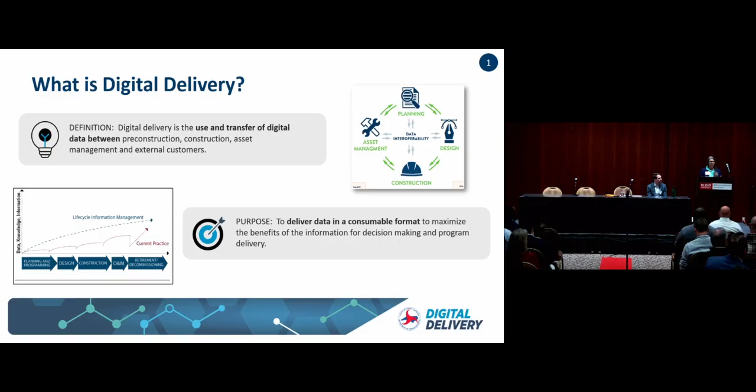The purpose is to deliver data in a consumable format to maximize the benefits of the information for decision making and program delivery. And I would say in NCDOT, from our digital delivery efforts, we have chosen to focus on design. There are lots of words going around about transformation and delivery, and you might have heard me say that in the general session yesterday, but when we're talking digital delivery, we have chosen to focus our efforts on design.

So we are not doing this in a vacuum. Efforts in North Carolina DOT and our industry and our team in general are trying to build on national momentum. So we're not doing this alone, right? We're trying to look at what has been done across the nation and really focus in.

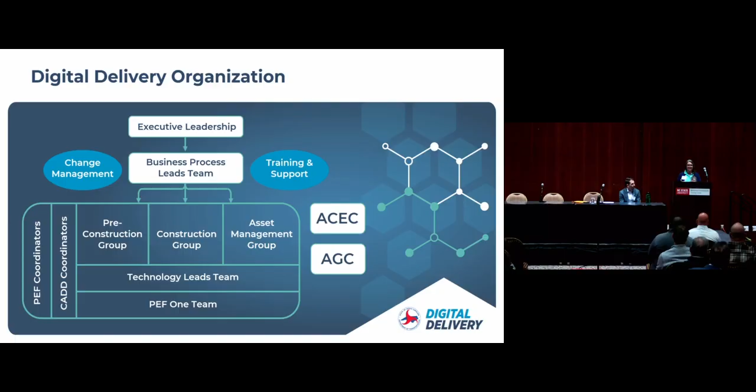In all of this, anything that we do, we have to put into processes, or we have to automate so good that you don't need a job aid. That would be my goal, because every time I need a job aid to work a tool, I can't find the job aid, and that's just frustrating. Wouldn't it be amazing if we just had processes that were so good we didn't need job aids to tell us how to use them?

I'm going to turn it over to Everett. He's going to speak a little bit about industry misconceptions.

Thanks, Jennifer. Yeah, so my name's Everett Loving. I work with Kimley Horn. I'm project manager, that's my day job, working for the divisions and PMU. But I'm also a part of the PEF1 team, which is a group of consultants and a contractor who was brought on by the department to support them in delivering the digital delivery initiative. My specific role there is the pre-construction lead. So we're primarily focused on how do we elevate our pre-construction designs and move what we're delivering forward so that we can be thinking about the handoffs with contractors and asset management.

So there's lots of misconceptions regarding what digital delivery is. If I asked this room to throw out definitions of that, we'd probably get 80 to 100 different answers about what digital delivery is. One of the most common things that we hear is, is it just 3D modeling? And the answer is no. 3D modeling is a huge part of this, and it's the department's goal, and you're going to see in many of our slides to talk about how can we have better 3D models, how can we have more consistency across different firms in terms of what we deliver, how do we make sure that what we're modeling makes sense and is practical, but it's also more than that.

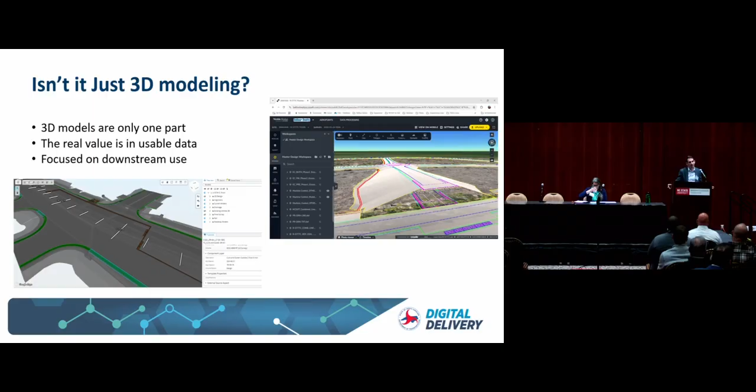So when you hear data, things that I want you to start thinking about is comment responses. How can we make sure that we're passing comment responses between an early review in the PDN, maybe the DRPS review, and then carrying that through so when I'm at 90% stages, we're not kind of recircling back to those comments. Another really important one is quantities, right? How can we make sure that our quantity evolution all the way from feasibility studies through to when we deliver to plans checking is consistent? This is helpful for estimates. It's also helpful for better bid packages. So we're looking at more than just 3D modeling, though that is a big part of it.

Sometimes we get asked, is it a specific software? Is it just Open Roads and Open Rail and Open Bridge? And it's not. For most of us in the room, if you are in those pre-construction design elements, that's probably what you're using majority-wise.

But we're also thinking about the handoffs downstream. If you're not aware, most contractors don't use Bentley products. So as we're thinking about what we're handing off to the contractor, we need to make sure we're not just giving Bentley models and expecting them to be able to use that. That's part of our coordination with the contractor group. I'm going to hit on in a few slides what are actual valuable exports that we're going to start packaging with some of our projects, getting into what's useful for us in pre-construction design, and what's helpful when we hand it off to the contractor.

So some of you might say, well, aren't we already doing digital delivery? Those of you who have been through the final design standpoint, especially thinking about design files, today, especially if you do a central let, you package all your design files, zip them up, and post them on SharePoint, and they become part of the package the contractor can choose to use. We presented to AGC a couple weeks ago with a bit different of a presentation, really talking about this downstream use.

There were very few hands that came up when we asked how many of you are using the files we are currently giving you. There's a lot of reasons for that. One is the data isn't predictable, it's not consistent across consultants, and it's not digestible for them. So it's our goal to start thinking about, as we move towards that final handoff between pre-construction and construction, how are we giving them things that they would want to use, that they can trust and rely on?

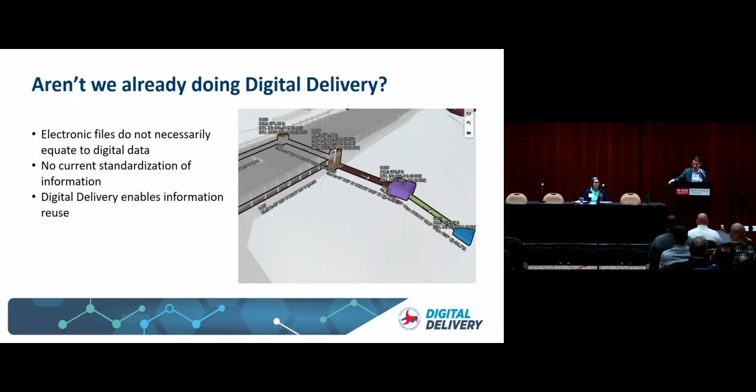We always get asked, and people automatically jump to thinking digital delivery means signing and sealing 3D models. So I want to say this very clearly for the room: we are not moving away from PDF plans. We are trying to elevate our design deliverables that we give to the contractor, but PDF plans this year, and in the coming years, is still meant to govern and be the controlling use in terms of what to actually build.

One of the reasons we have inconsistency in the past between PDFs and design files is a lot of times we were designing things, and then as we were preparing our plans, we were making hand edits, or changing things inside the plans. Inherently, when you do that, you create inconsistency between the plans you deliver and the files that were the starting point.

In ORD and OBD, it's set up where the model is the center of your design. Those of you who might be frustrated because you can't make hand edits nearly as easily as before, that's important, because we want the plans to be a reflection of what the model actually shows. So our design files should be more in agreement and more consistent with what the plan deliverables are.

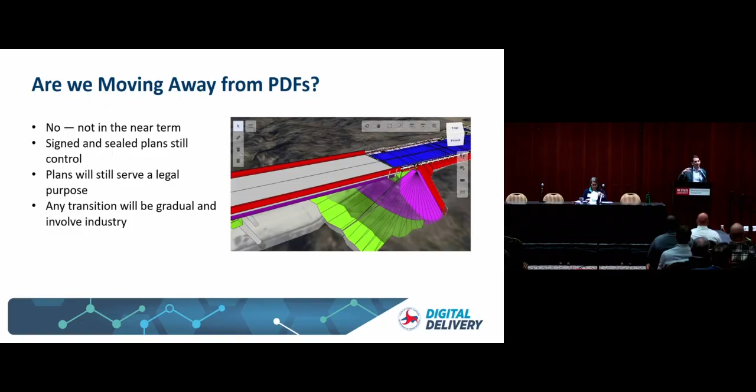I'm going to hit on in a few slides the uncertainty about why you can't get comfortable with the design files, especially for those of you who are project managers. We're going to talk about some of the things coming down the pipeline. We want to make sure people who aren't in CAD can feel comfortable about the design files, and we'll get to that in a few minutes. But for now, I'm going to pass it back over to Jennifer. She's going to talk about value added.

All right, so when we think about adding value, obviously the first thing we need to think about is what problems are we solving, right? Stopping to really think about what problems we're solving. Coordination issues between disciplines is the top bullet there for a reason.

Everett mentioned that we talked to the AGC, and one of the things we talked about when we presented to them was that projects don't get built by plan sets. They get built by a contract that is for the whole project. So oftentimes when we have misses in design, or make poor decisions in design, those things become abundantly apparent when they get on a job site and the rubber hits the road, right?

The coordination issues between disciplines, to me, is one of the biggest things we need to address, having a collaborative workspace where we can see all discipline work. If you've ever worked with me on a project, you might have heard me joke about turning on all y'all's levels. There's much truth revealed when you turn on all y'all's levels in the technology. It sometimes reveals things you don't see when looking at things from different plan set perspectives. So our hope is that eventually we have a turn on all y'all's levels built into this process somewhere.

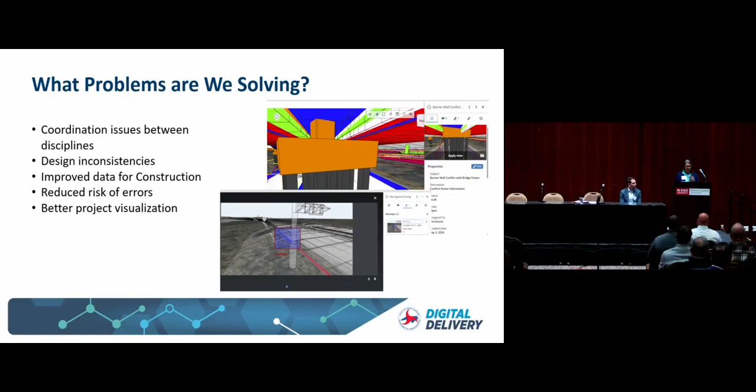So in the end, who benefits from these efforts? I hope each of you can think about some way you will benefit and how our industry will benefit. Obviously designers will benefit, with enhanced interdisciplinary validation, construction teams get fewer assumptions and better visualization at bid.

I was very surprised at how much feedback and comments we got from the construction industry. Mostly after our formal session, we had a good bit of dialogue and a lot of interest from construction teams. Honestly, a lot of those folks are already working in different platforms and doing visualization and modeling on their own, so really we're enhancing what we provide them.

Maintenance and operations benefit by obviously providing digital as-built, helping figure out how we better support timing our maintenance. And agency leadership benefits because we're increasing our confidence in constructability, working to reduce our errors and omissions.

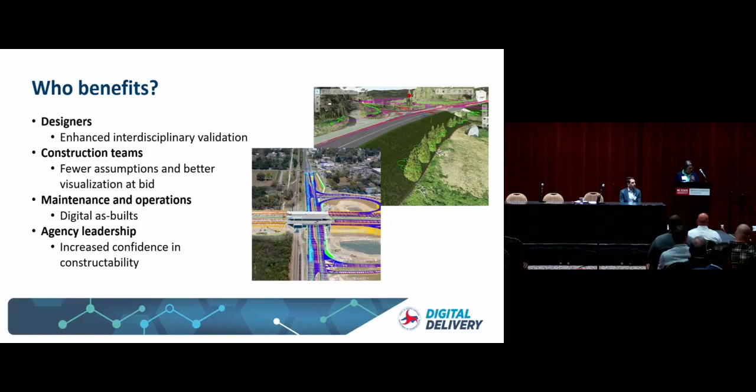So the next slide, harder, better, faster, and stronger, talks about the ways we can improve our data quality, reduce our cost and delays, recognizing that these things don't come automatically. There is a learning curve.

I was talking to a few folks this morning from division, and it is taking some additional time right now to do designs if you're not familiar with the software, and we recognize that. But hopefully as we work and move toward guidance, training, and information, and people get better experience, we will actually get to the place where we achieve that green star in the middle of that slide.

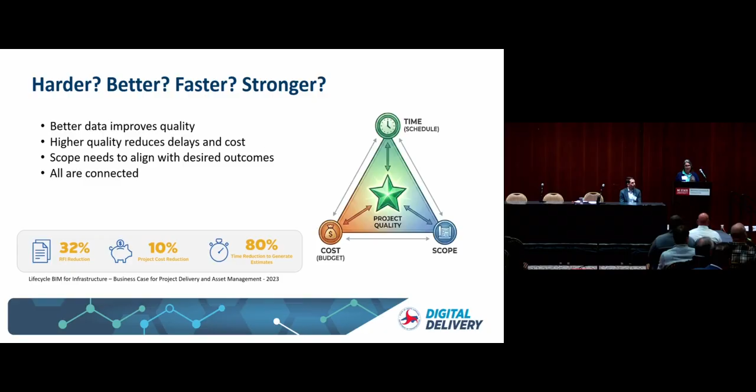So on this slide, impacts to coordination, there's a few points about this, and I kind of already talked about the turn on all y'all's levels, but the first bullet here says model, federation, and data.

I'll be honest, Everett put these slides together for us today, and he put that bullet on there, and I put a note in here that I'm going to need an expansion of what model, federation, and data means, because I didn't know what that word meant. Then I remembered we have a new CAD glossary. I'm going to do a shameless plug here, because we have a new CAD glossary that came out in the updates you all should have received about our CAD manual. So I pulled out my CAD glossary and wondered if federated model is in here.

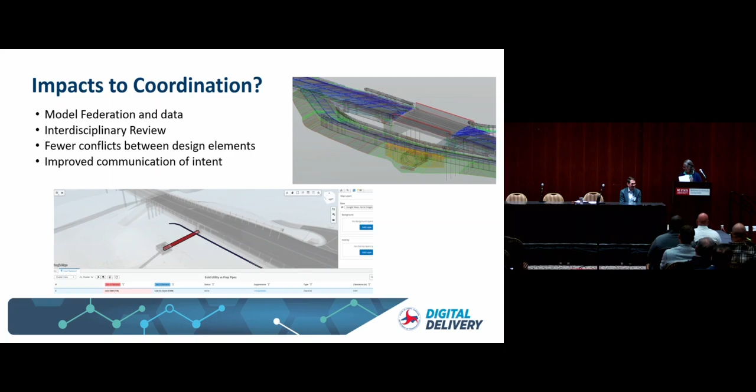We have tried very much to capture words that we use in our conversations in this glossary. I printed it because I'm going to use it. Most of the time when we're in meetings and words get thrown around, I either check to see if they're in the glossary, or I point out they're not and get them added. So hopefully it will be as helpful to you as it's going to be to me.

How is data used after letting? I think, as I alluded in my Blockbuster analogy yesterday, it's often underutilized today after letting.

We talked about those PDFs that we save in perpetuity. When I first started at NCDOT a long time ago, we had plan racks in the attic in Division 2 — a pull-down set of steps into an attic with wooden shelves of hanging racks of plan upon plan upon plan. As staff engineer, one of my jobs was to go up and pull as-builts for people looking for information.

I had a whole catalog, and I would go up into the attic and get the plan racks down. At this point, I don't know that we're even keeping paper as-builts anymore, because we tried to move away from that and went to electronic — maybe we're halfway there.

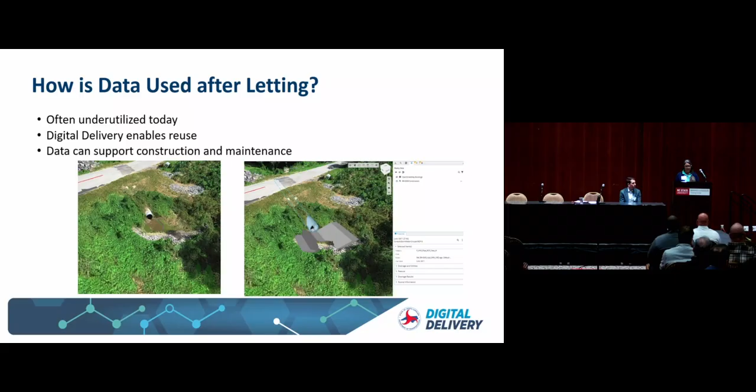I hope we get to a place where we have a very solid as-built program, because for folks working in divisions, maintenance, and small projects, you can glean a lot of information from that. We want to make sure we make that more accessible.

All right, so I'm going to turn it back over to Everett. He's going to dive into design engineer expectations.

Let's drill down a little more into what am I supposed to model. Am I expected to model everything? This question comes up a lot because what we did in MicroStation was a lot less than what we're doing now. So we're trying to answer the question of what's helpful and what is valuable.

We worked through this with the department in the fall of last year on level of development — really getting after where the department wants to go in terms of how much modeling they want, 2D or 3D. The vision was we don't want to waste time on things that don't matter. If you've worked in OpenBridge or OpenRoads, you know you can spend a lot of time, and sometimes the hardest part is going from a 90% ready model to 100%.

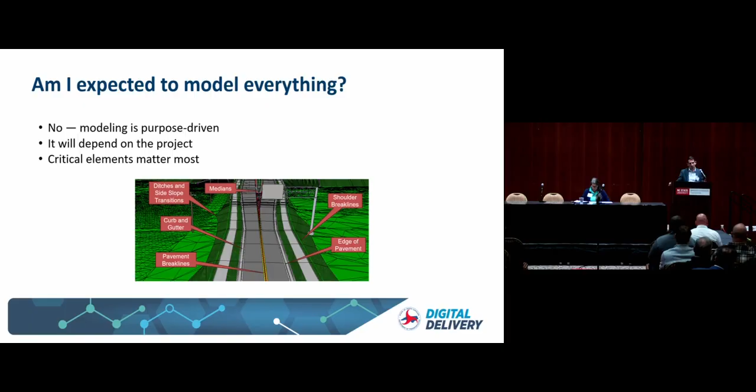It's that extra detail that takes a lot of the time. So for the department, the intent is that we only focus on things that are valuable and will be used downstream.

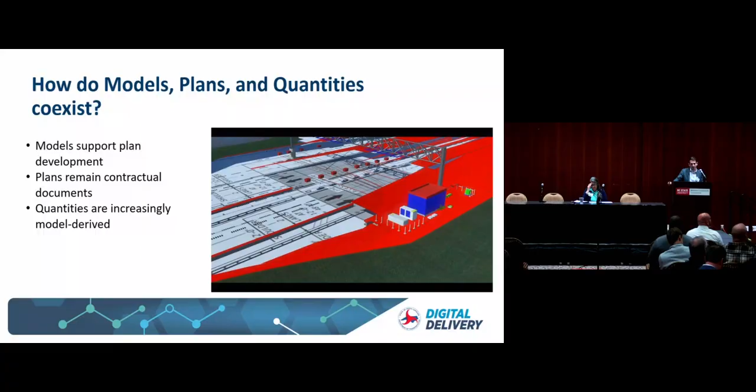But what's happening right now is the model is coming up out of the space, so you can start to see there's a toll plaza here with some underground utility elements, and then just like that, we've got a roadway working on top of it.

What's really powerful about that is, sure, all of us could probably get our heads wrapped around that plan if we had enough time. But in 10 seconds we were able to understand a lot of the complicated systems working underneath there. That's the power of having everything modeled, not just roadway.

That's what we're trying to move toward — this isn't just visualization for the sake of a public meeting map or public involvement, though that is valuable. It's also really valuable for us during design to be able to see all these things together.

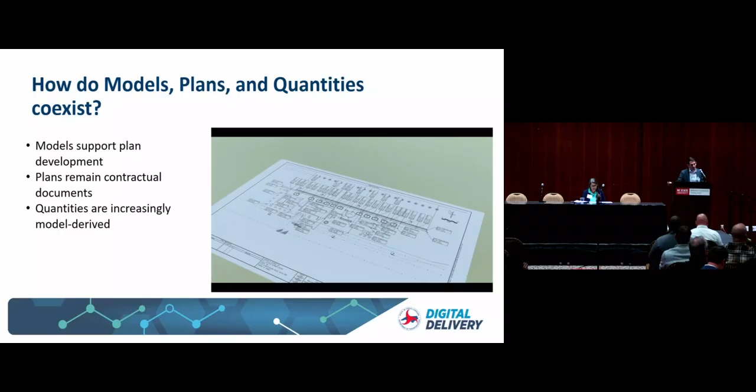Let me run that back one more time, because another important development here is that the plan is not the origin point of the model. It is the cut and how we're displaying information from the model.

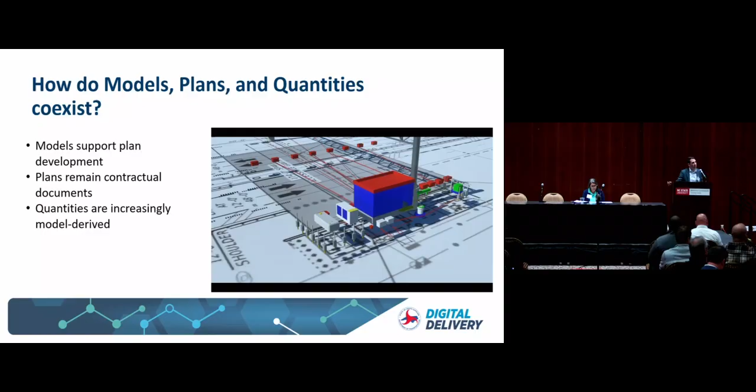That's a big shift — the plans are really just a representation of what's in your model. If your plans aren't showing good information, it's because your design is flawed. So when we're thinking about quality reviews, we're moving past what the label says and more into what your design actually says.

Is additional information produced? Sometimes. I think that's where we're trying to provide a little more clarity from the department in terms of what is expected at any given submittal, especially when it comes to design elements.

In general, the core responsibilities remain the same — what you're expected to do as a roadway designer or hydro designer doesn't change. But the deliverables become more model-based, and we're focused on data, accuracy, and clarity.

So what I want to show here is a graphic of a corridor, and it's got our super elevation on here.

It's probably a little small for folks to see, but basically we're in a full 6% rotation here, and then we rotate back to normal crown over here. This is not an extra add-on. This is just a setting that, if we set up the workspace correctly, it can do.

Notice these light blue areas right here and right here. This represents where there is flat cross slope, which for any good designer should immediately flag that I want to go look at my profile and make sure we don't have a low point in this area because of hydroplaning concerns. You'll notice over here we've got a low point on our shoulder because we've modeled this correctly in terms of our rotation from travel lanes over to shoulder. And likewise, as we're getting back towards normal crown, we have another low spot.

Again, this is a visualization add-on that doesn't require extra work if we set it up correctly, and it's allowing me as a designer to step right in immediately and process this much quicker.

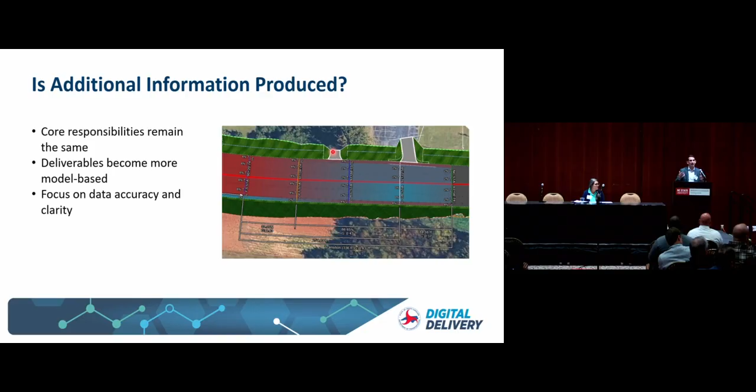By getting more fluent with the model, it actually helps us ask design questions earlier than before, when it was just a 2D drawing that reflects the model. Now we've disconnected design from production. So these are the kind of things we're trying to work on as an industry, to help elevate and ask, okay, if the software can do this for us, how can we make sure we're utilizing this over and over again?

Won't this increase design effort? In some ways, yes, the design effort is higher. And for those of you who have been in this space for years, you know that when you're in Open Roads or ORD, we're asking more in terms of how to do design.

However, long term, what we're seeing, and this is outside of North Carolina, is that this does pay dividends in terms of what we see from a project life cycle. It results in fewer change orders. It results in fewer issues in construction. It results in projects not being delayed because we've coordinated farther in advance.

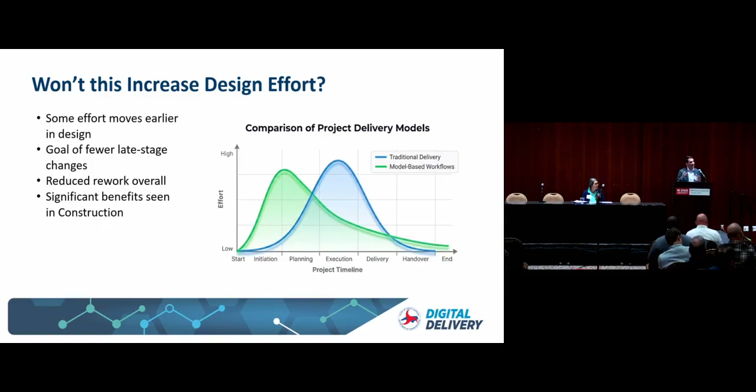The other advantage is as we automate production more and more, that becomes less of where we spend our time. So we're spending less time labeling and adding comments on plans, and more time modeling driveways or advancing our hydro design. It's really a reallocation of effort to where it matters, and asking the software to do more of the production legwork. That's really what we're trying to do.

How does this affect QA/QC? Earlier I talked about the project managers. How do I enter into this? Maybe I don't even have Bentley products on my computer. I certainly don't feel comfortable with how I could get in there.

Bentley Infrastructure Cloud is a product I would encourage folks in the room, if you're not familiar with it, to explore after this week, after the conference. It's Bentley's product specifically related to project managers. You don't need to have ORD or anything installed. It's a web-based viewer. What you do is set up in ProjectWise your model that directly links to this, and it creates a copy for you that can sync at whatever regularity you want, every night, every week, whatever you want.

You can pull it up on Wi-Fi very easily, and it's really intuitive in terms of, if I'm a project manager, how can I pull up cross-sections? How can I pull up alignments? It's very quick, and it's very data-rich.

That's where the department is moving towards. We're trying to figure out the right way to say, for this given product, we're going to have this kind of 3D model review. We're going to take our time with that, figure out what works and makes sense before we roll it out everywhere. But the idea is, to Jennifer's point, if we have all these files that are all in 3D or 2D space, we need to turn them on, and we need to all look at them together, both industry project managers and NCDOT project managers.

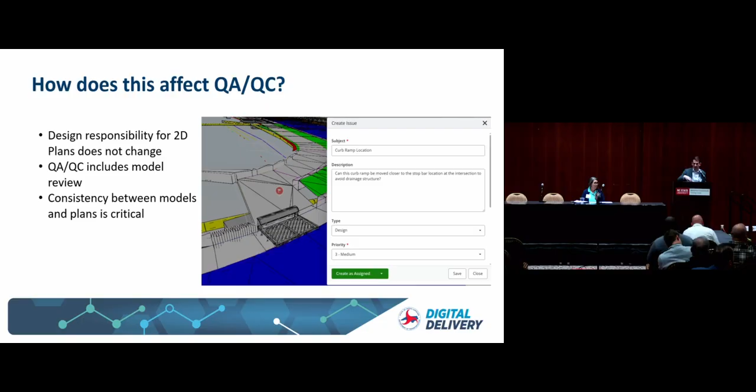So with that, I'm going to pass it back over to Jennifer. She's going to talk about implementation reality check.

One of the questions I see a lot is: is this project going to be digital delivery? What we felt like we needed to discuss is digital delivery, all or nothing. One thing I've learned through this process is in the OpenX platform, there's a level of modeling that has to be done on every project. So every project essentially has a model, meaning there's potential to digitally deliver any project we choose to. So when you ask if a project will be digital delivery, the answer can always be yes.

The question our teams are going to have to work through is to what level. I don't want to get ahead of Everett, who's going to talk about standards in his next section, but what was missing from an NCDOT perspective was: what is the model? What do we expect from it? We have to help our project managers and project teams understand how to talk through what's appropriate for a project, how you scope that, how much effort it might take. There's still a piece that's missing. To really get to a place where we're openly having good conversations about what level of digital delivery we want on a project, we still have some work to do.

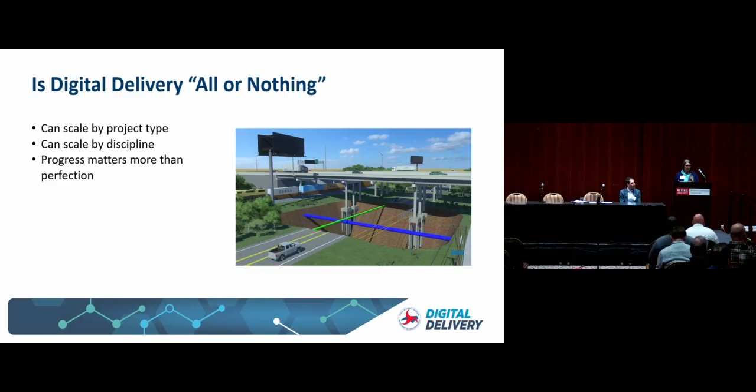But I want everyone to understand that just because you say you're digitally delivering something doesn't mean you're modeling the world. Clash detection is a great example - that's an area a lot of folks are super interested in, specifically looking at drainage pipes and utilities, which is a biggie with conflicts. Some projects may be appropriate and some may not. There's going to be a level of effort involved in doing really good clash detection for a project like an urban widening. So teams are going to have to be very selective about putting the right project with the right digital delivery effort. More to come on that in the future.

How do we adapt to new skill sets? Obviously, as we're adapting, a transition period is expected. I think we're in a transition period, and we'll continue to be. We may be in that for a long time, because honestly, as soon as I get adjusted to some technology, there's something new, right? So the transition period may be in perpetuity.

But standards, like I said, we have set them. They also will continue to evolve and transition.

Training and collaboration is key, and we're really trying to focus in on that in '26, end of year '27. One challenge we had, one of our goals was to start implementing training, but we found we couldn't train because we hadn't defined what it was. It's pretty hard to teach something you haven't established. So we have our eyes set on late '26, and we're focused on our NCDOT project managers first, because I see them as the leaders of teams who are going to have to help consultants and industry move forward on projects. We're going to train them on scoping efforts, understanding, and connecting them to viewers and things like that, to put them in a position to help lead teams forward.

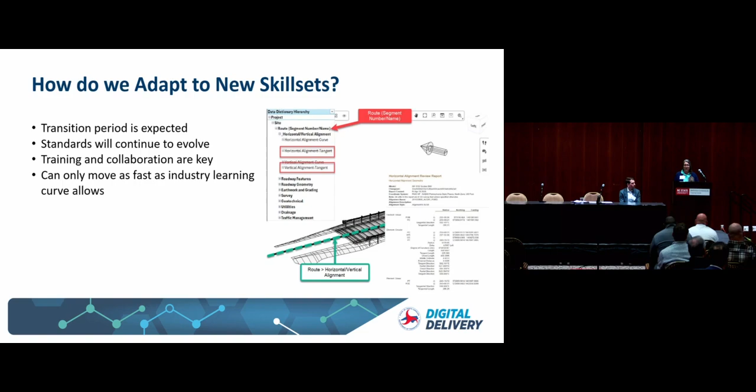The last bullet says we can only move as fast as the industry learning curve allows. I'd just say we are following that, and we are listening, and we want you as partners where you learn, we learn, and we're going to shine a light on cool things all of us are doing.

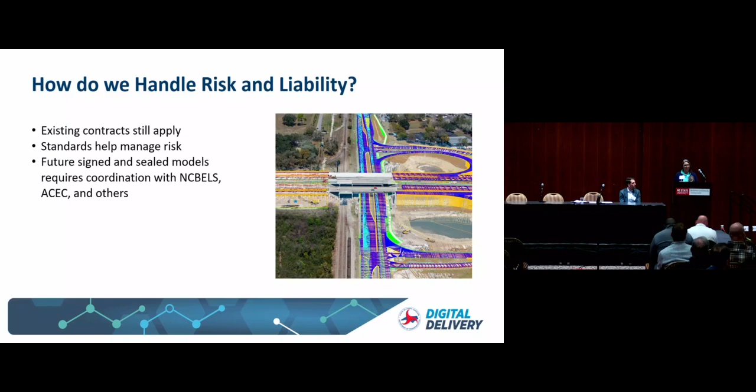How do we handle risk and liability? Everett said this, but I'll say it again: we recognize that model-as-sealed, model-as-legal-document is an aspirational goal we are not ready to talk about. We are slow and deliberate, stepping through with PDFs, looking for ways to simplify our PDF plan production to make that work less, so we can invest more time and energy in the model. So with that, I'm going to turn it back over to Everett.

So to me, that's the theory behind the case in terms of all those slides building up to now. Now we can actually talk about some very practical things, some of which was announced last week, some of which will be coming later in 2026. So we're going to talk about new standards and guidance that either have been rolling out, or we're going to give a tip of the hat to where we're headed in this space.

I want to talk first about the Unified Workspace and OpenX 2024. NCDOT historically has had a workspace split up based on discipline units. It's been role-based in its origin, and NCDOT made the decision last summer to start reworking that approach. It reflects the truth that a project is all the disciplines combined, not individual disciplines.

So what was released last week is a unified workspace. It's maintained by the new CAD Support Services Group, CAD Innovation Team, EDCS, but it is not discipline-based individual elements anymore. We've paired that up with OpenX 2024, another version of Bentley software with new capabilities inside of it. Both of those things have been released as of last week.

A part of this is the policy that all new projects from this month forward need to be in OpenX 2024 using that unified workspace. This is going to be good for your design teams because you're going to get all the capabilities of OpenX 2024, and you're also setting yourself up well to have all the other improvements we push out into the workspace in the coming year.

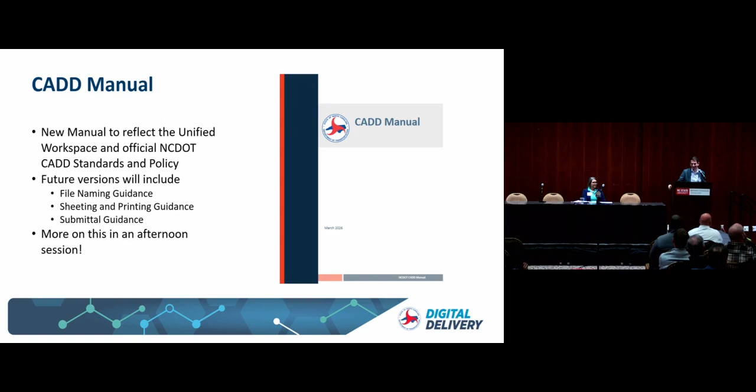Would encourage you to attend Vaseem and I presenting on that later this afternoon.

So I plugged this a little bit before. I could probably spend a whole hour talking about level of development, but if this concept is new to you, it's going to be an important one to get up to speed on. We presented on this at NC Lug last year. I'm sure we'll present again more coming up.

Level of development is often called LOD, and sometimes when we say LOD, we can think level of detail. So I really want to talk about those two together. Level of development is all about the design intent and the reliability of the data in terms of how we design and what we're giving to the contractor.

We're trying to set clear expectations that when I place a manhole box in my design and the contractor sees that, what can he rely on building-wise? What can he say, hey, that's just a cell that was dropped versus one that actually has design intent behind it. So the overall vision is that as we produce more and more higher quality data models and give that to the contractor, we would be designating, hey, this is more for reference only, or this has actually been thought through and you can rely on it.

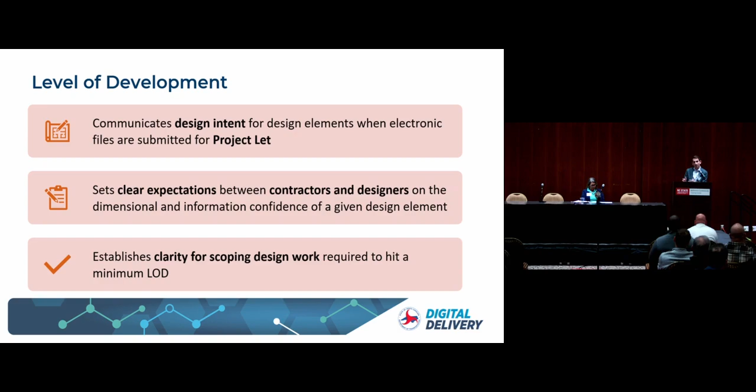And that is a tricky business. We spent all of the fall working through this with the NCDOT units. The NCDOT level of development spreadsheet is available on the digital delivery website now. We walked through with every single unit the pay items inside the spec book. We've gone into detail on every single one and identified what is the minimum LOD that the department wants to get to, and are we aiming to be modeling that as 2D or 3D?

Because level of detail is really just kind of how much detail you have in a specific element, but development is even more than that. It is, did I think it through when I placed it? So as we worked through this, there were lots of interesting conversations, maybe just giving you a flavor for kind of what some of the discussions were.

When we were working with the hydraulics group, we were working through kind of pipe plugs and pipe collars. Both of these pay items, as you think about them, generate cubic yard quantities. So as you think about it, okay, well, cubic yards, we need some sort of volume component. 3D is inherently what you would need for a volumetric component.

But we really dug in and we said, okay, well, pipe plugs are typically used when we're in construction, we're building some of the pipe, we're going to bury it, and we need to plug it for a moment. We really just need to know generally the location where that's happening. Does it really make sense to ask industry to model the full length of the plug and fill out the specific dimension of the pipe? That seems like a little bit of a waste.

And so what you'll see here for pipe plugs specifically is that where the department wants to move is a 100 LOD, which is really just a point value. All we're saying is where we've designed that to the point, that's accurate. And then just a 2D design.

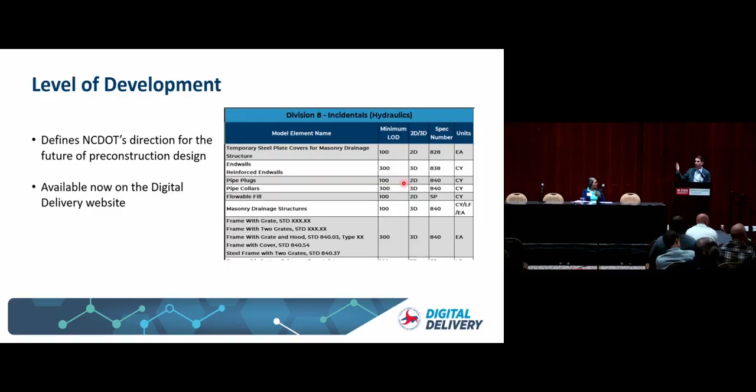As we started talking about LOD, we realized, well, if we say we want pipe collars modeled in 3D, we might need to give a little bit more guidance. Some units have done a phenomenal job already in terms of trying to talk about what's expected from a 3D modeling standpoint. One of the things we started to realize is the PDN shines when it talks about, hey, maybe go talk to this unit or this unit at a given different point, but where it's potentially lacking is in the 3D design elements.

So let's think about a retaining wall at a bridge abutment. I'm thinking about generally an MSE wall that's sitting in front of foundations for a bridge end bent. And who starts the roadway envelope? Well, one option would be that in 2RD2, when you're developing your DRPS, the roadway designer would be responsible for applying that template.

They're the one who knows about the grade both above and down below, so they're the one who's going to build the MSE template that will be inside of their modeling. Then potentially we could hand that off to geotech, who's going to do their own geotechnical designs and get borings in those areas. But now we need to make sure we're coordinating with structures, and they're going to get involved in 2ST2 during their PGD's development.

And now we have to make a decision on that model, that MSE wall - who is modeling that anymore? Do we take it out of the roadway designer's bucket and it's now something structures develops? Maybe, but as we keep moving through here, it gets even more complicated.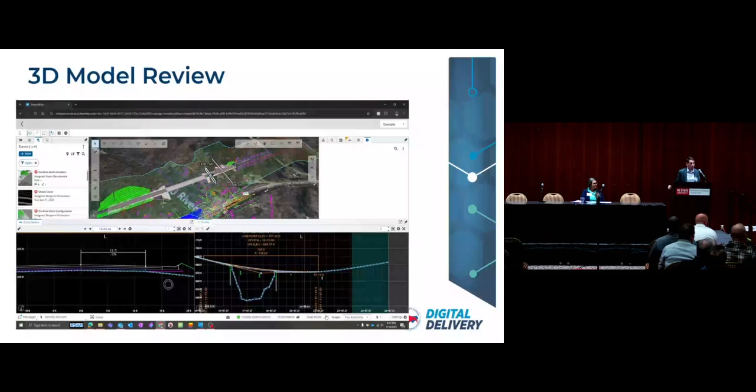We can see our drainage pipes down in the bottom left underneath the cross-section, so we're looking at potential conflicts there. If we had our utilities modeled, we'd also be able to take a look at that. The review settings, to me, work way better in Bentley Infrastructure Cloud - being able to pull cross slopes, looking at lane widths - a lot better than the cross-section labeler tool inside actual ORD. The speed and the ability to pull up whatever you might need is really helpful.

This is now going to get into some side slopes, right? So being able to pull off a dimension immediately from your side slope and looking at length and height - all that can be really valuable.

I would encourage PMs who may have been reticent—this is something you can use immediately if your project team is setting up your iModels correctly. There will be more guidance coming out in the coming year about how we want to do that through NCDOT's ProjectWise.

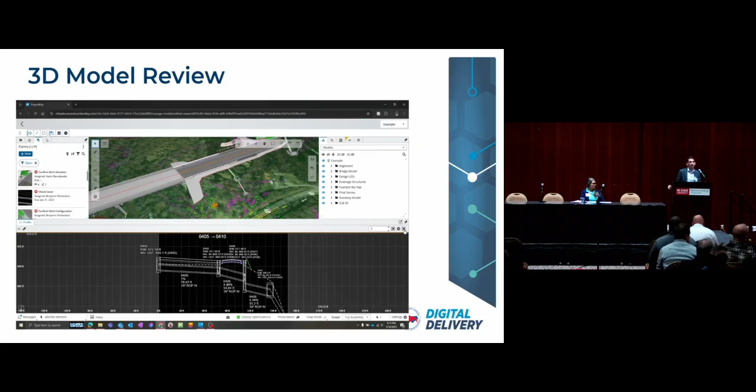It's not just roadway elements—and I'm always guilty of spending too much time on roadway examples given my background. But there's power in looking at hydraulic systems too, quickly pulling up pipe profiles, structure numbers, inverts in and out, and grades. What we're trying to show is that the technology has power if we know how to use it. The department will continue to put out guidance, but these are all things Bentley also has guidance on for your projects.

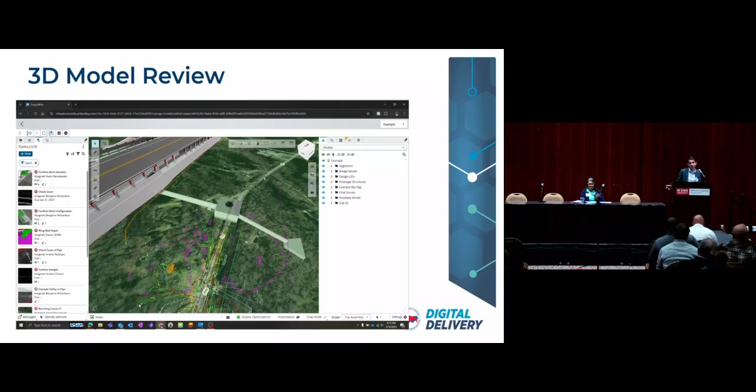So I'd encourage PMs to look into this for your project. It doesn't take long to set up, and it can be very valuable.

All right, now I want to move into construction-ready electronic files. This is a new term we're rolling out. Before I forget, the construction-ready electronic files guidance is also on the digital delivery website, so if you're curious, please go look into that.

As we've started to dig into this—well, we already provide DGN files to the contractor, we're already providing Bentley files, but they're not using them. So what's a way that, as part of our LET packages, we can provide better files that are more digestible outside of the Bentley space? That's where CREFs come into play.

We anticipate this will become a consistent deliverable in the coming years—not today or tomorrow, but in the coming years—and these would be deliverables you'd prepare as you get close to let. There are 6 of them, and right now they're information-only files: alignments and profiles, final grade top surface, final subgrade surface, existing top surface, and 3D break lines and 2D planimetrics.

Our plan in 2026 is to share those with contractors and request feedback—here's what we're giving you, is it helpful, is it not, how can we refine it? So this guidance is very much going to be dynamic, but it's for information only.

The contractor has been, and will continue to be, told very clearly: the plans are what governs. So this is us avoiding any risk here, but really starting to step into how we can deliver files he can use that reflect what our grading is doing.

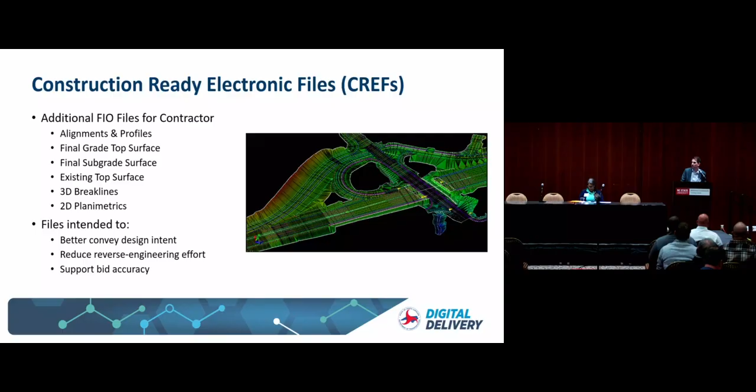Jennifer mentioned the pilot program—for those who aren't aware, there are 2 projects currently in construction that we're piloting with contractors. We've identified several other projects we're going to let this year, and those project teams are preparing CREFs as part of their deliverables.

They'll be 6 information-only files, shared with a contractor, and as part of the contract, it's to get dialogue with them—we want feedback sessions with them.

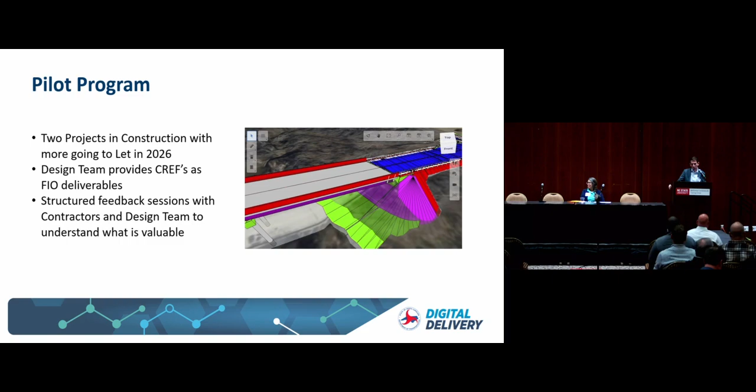In some cases we may be dealing with a contractor who's very experienced with this, which will be really helpful. On the other hand, we may be dealing with contractors for whom this is their first time dealing with modeling, which is also important. We want to make sure our contractor partners know how to use these files, so it's a 2-way street—we're trying to have lots of dialogue, and I'm sure we'll learn quite a bit from those discussions.

So all of that is a lot of different guidance, some of it coming soon, some already out. Everything the digital delivery team is doing plans to be anchored inside the PDN. The CAD manual, CREFs, digital delivery elements, all of that is meant to be anchored inside the PDN.

We just had a PDN update in February. There will likely be another PDN update later this year, and it's our intent to include some digital delivery elements inside of that PDN. What we want to do is give really good guidance for people who may be really familiar with this space or not, on how this affects their project. The PDN is a menu of options, and project managers decide what should be included on their specific project. We want to be really clear about these items and help folks know when to make decisions. So the first one: OpenX version and workspace policy.

One of the confusing things right now is, okay, DOT, you just issued a new workspace and a new OpenX 2024 - does it affect me? You'll notice we gave a policy directive about new projects. The department has over 1,500 active projects, and has not given guidance in terms of an existing project - what am I supposed to do? If you come later this afternoon, the encouragement is going to be, you are welcome to upgrade, and it would probably be in your interest to consider doing that.

But what we want to do with the PDN is actually have guidance so that when you start to scope your stage 2 or stage 3 activities, it's one of the questions you ask, and you work with your project manager to say, okay, given this project and where it's at in its life cycle, does it make sense to upgrade to a new version? Does it make sense to move into the unified workspace? We're not there yet with the clarity. We're going to get there, and that's what we want to provide for people.

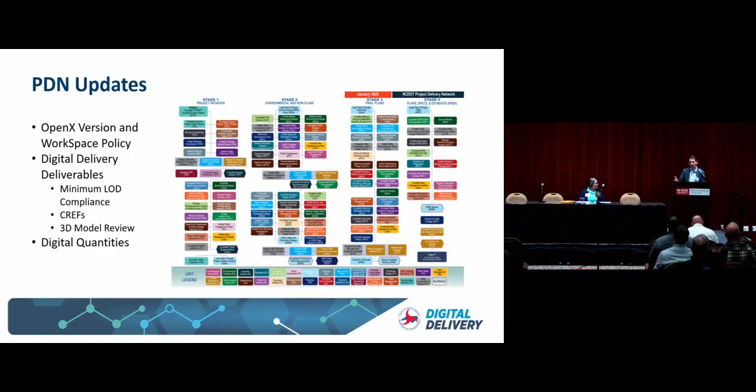So with that, I'll pass it off to Jennifer, and she's going to talk about looking ahead. Looking ahead is probably looking ahead to break, right? So before I go to the slide, I'm going to just speak for a minute. We have a few minutes, and as we think about looking ahead, I wanted to mention a couple things.

Everett just used the words conversion and upgrade in that conversation, and I'm like, I don't know the difference between conversion and upgrade. It's in the glossary, but you'll go over that this afternoon. For our non-design people not as familiar in the room: conversion is when we move from MicroStation into OpenX. Upgrade is when we're moving between OpenX versions. What I would like you to take away is we had to do a conversion that was painful and difficult when we went from legacy into OpenX. The goal is that we don't have to do that again, and that we upgrade in a timely manner with intervals that don't take a lot of effort. And so as we talked about this unified workspace and moving into 24, we wanted to...

Try to ensure that it's not going to be large efforts as we move projects forward once they're into OpenX. I just wanted to make sure everybody is clear on that, because that's an important thing for folks that don't do design and don't work in this every day.